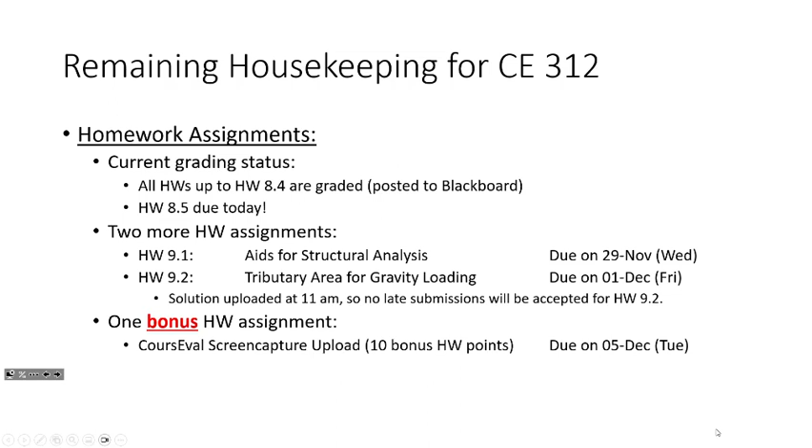Okay, let's talk about some other remaining housekeeping. Let's talk about lectures. So we're going to be doing structural analysis aids today. We're going to be doing tributary area on Wednesday.

These two lectures, if I wanted to give an overall theme, it's about bringing the class back to the real world. That's what we're focused on this week. And then we have our exam review on Friday.

The exam is on Tuesday, December 5th. The time slot we've been assigned is 10:15 to 12:15, but don't think that means I'm giving you a two-hour exam. I'm not. This exam will be formatted just like all the others. I'm designing it to be 50 minutes long, but you still get the full two hours. Just about every time I offer this exam, an hour and a half in, most of you are already gone. This is not intended to be a time crunch, and it's also not comprehensive.

What I'm covering on the exam is everything we're covering this week and influence lines. I'll also probably ask some conceptual questions about mastan, but you won't be running mastan on the exam, just conceptual questions on it. But influence lines, mastan, and what we covered this week—that's the final.

I'm also going to do a course learning outcome survey during the exam, just rating the course outcomes on a 1 to 5 scale, but that's pretty straightforward. That's this class in a nutshell. Done. Anybody have any questions?

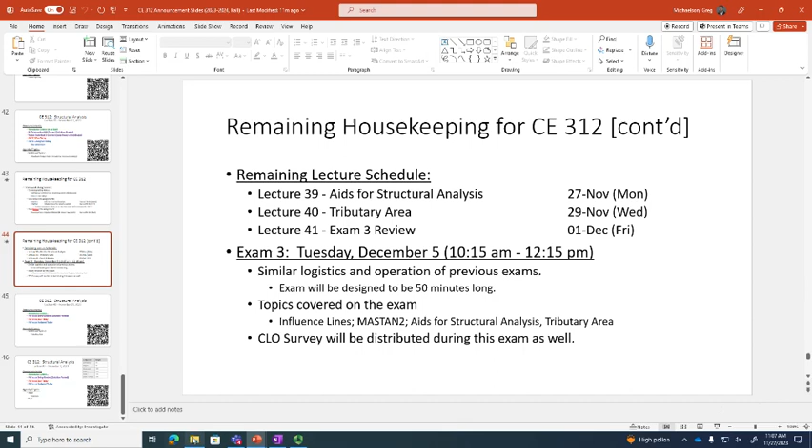All right, so that's the logistics for the class in a nutshell. Let's get into some topics. I have two additional topics for discussion today, and like I said, they're focused around the real world.

The first topic I want to discuss is what I call aids for structural analysis, or maybe a more specific way of phrasing it would be a formula set for common loading situations. So what do I mean by aids for structural analysis?

I want to refresh everybody's memories for a second and look at these two problems. Now, it's been a while since you've done some structural analysis, unless you did the homework assignment about 20 minutes ago. But if you did your structural analysis assignment before break, it's probably been a while since you've done this. I want to look at these two problems and make the point that we've analyzed these problems this semester in class.

Whether we were focused on determining reactions or shear and moment diagrams or what have you, we've done these problems. Now, I want to be clear, I don't think that was a bad idea. These problems are kind of tough, but they've served a purpose from an educational perspective. My philosophy is that if you can analyze this, you can certainly analyze what you're going to do in the real world.

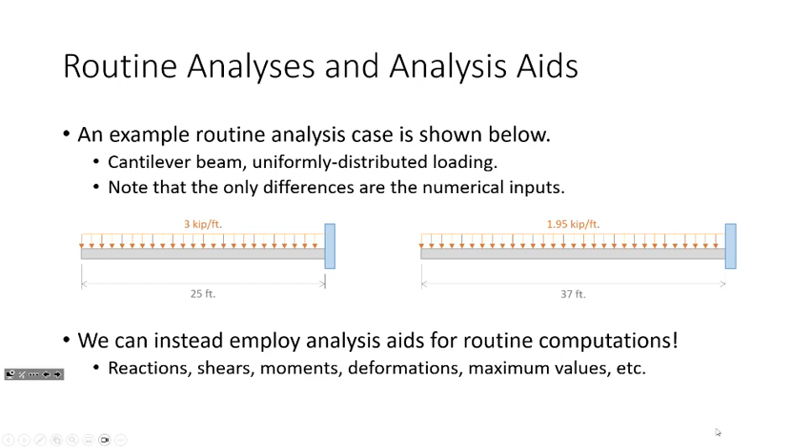This is very useful when dealing with routine cases. I can't tell you how many beams in this building are treated as simply supported beams with uniformly distributed loads. If you can do that one problem, you can do it over and over again. In fact, when we do beam design in steel, that's a lot of what we'll focus on - pretty routine analyses. Now, these analysis aids are neutral in regards to units, so there's no unit conversion factor built in. So whenever you're looking at deflections, you either need to use a unit conversion factor, like WL to the 4th over 8EI times 1728, or plug everything into a consistent unit system.

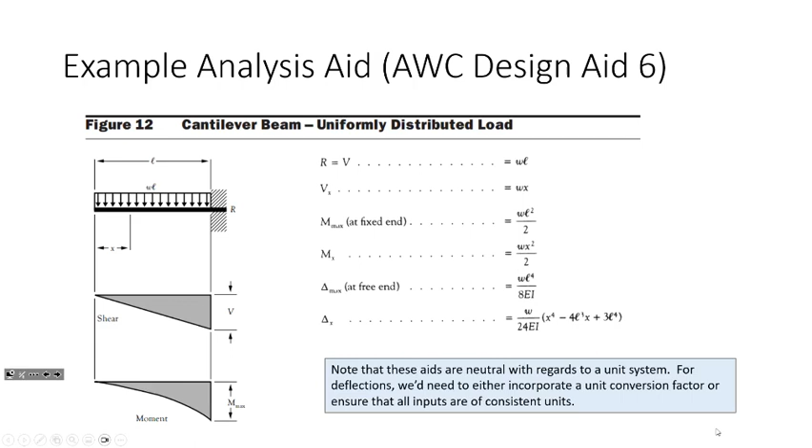I just mentioned that so you're aware. So this one is from the wood specification, this one is from the steel specification, this is from the steel manual. For those of you taking steel, you'll end up buying one of these steel manuals, and we'll actually use aids like this in the class. There are a couple things you need to be careful of when using the analysis aids.

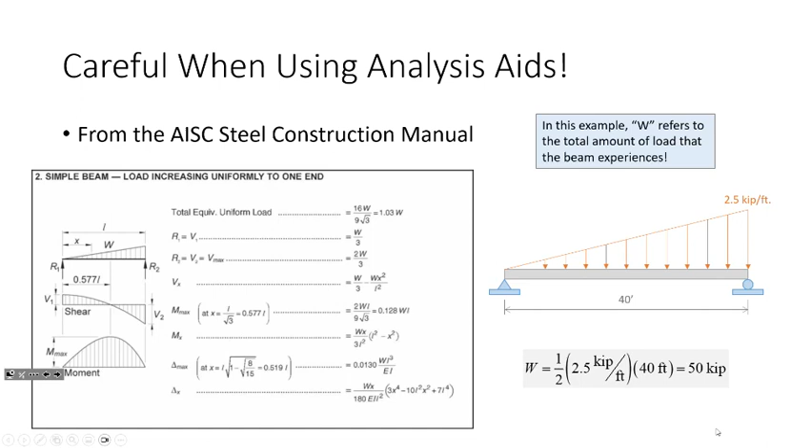Now I propose what I can do is say that equals this beam plus this beam. You see what I did? I'm just treating each load separately. But here's the problem.

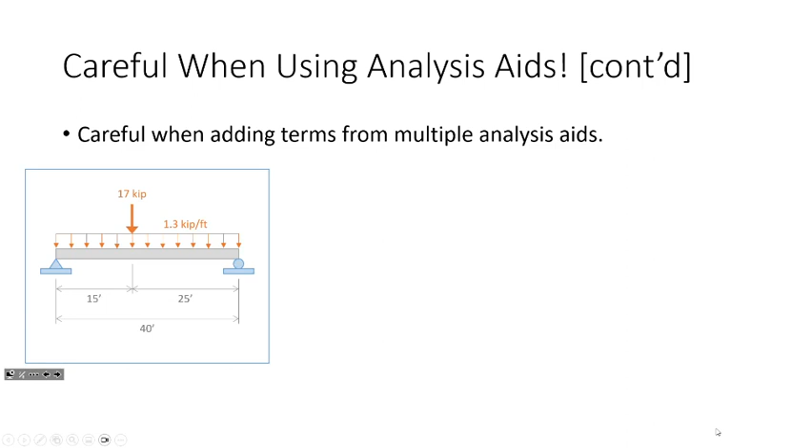So let's take the first beam. Here's the first beam, a simply supported beam with a uniformly distributed load, and I can calculate the maximum moment. Now the maximum moment is the biggest value on the moment diagram. For this beam, that's going to be right smack dab in the middle, right? But on this beam, it's not in the middle.

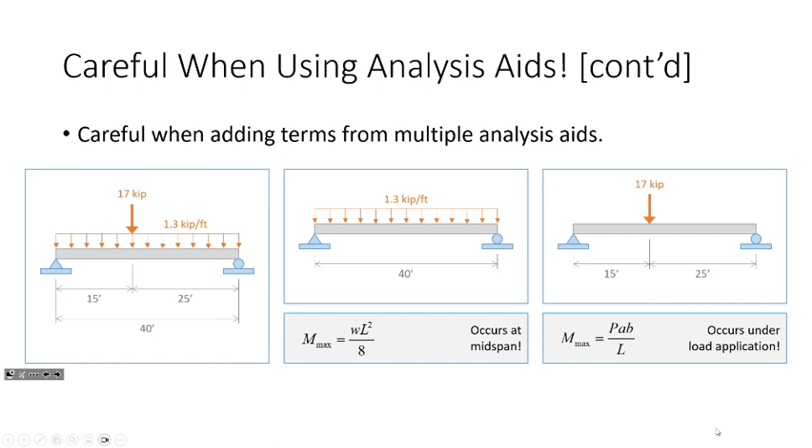For this beam, the maximum moment is where the load is. So sometimes when you're using these aids, you're tempted to say, oh, the maximum moment is that plus that. That's wrong, because those two values don't occur at the same location. So you can't add those Mmax terms together because they don't align with a similar location on this beam.

But what you could do, instead of adding the Mmaxes, is add the moment functions together. Probably what I would do, if I was doing this problem, is handle it one of two ways: add up the functions in Excel and plot it, or honestly, I might just analyze the structure myself without these aids.

These aids are intended to be shortcuts for simple situations. But if the problem gets too involved, the question is, do I really want to break out all these odd formulas, or do I want to just do the problem?

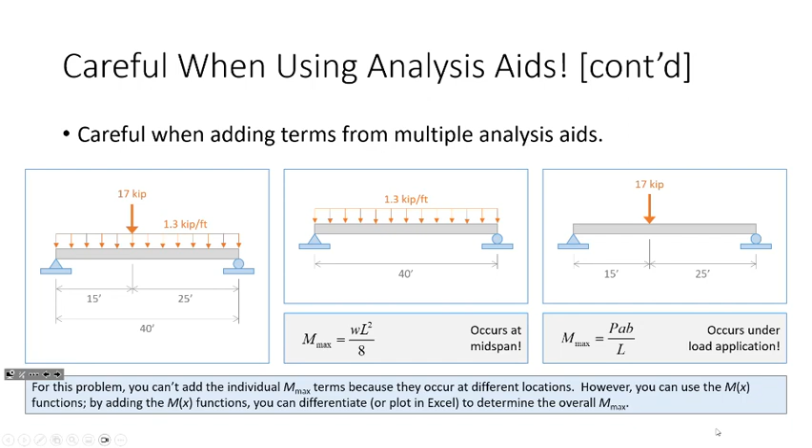One of the things about all the methods we've been discussing this semester is that they work great for problems like this. This would be a really bad problem to use analysis aids on, because for one, I don't think you'd find any analysis aids for a problem like this. But even if you did, the math would get so cumbersome that you might as well just analyze the problem directly anyway. Does that make sense?

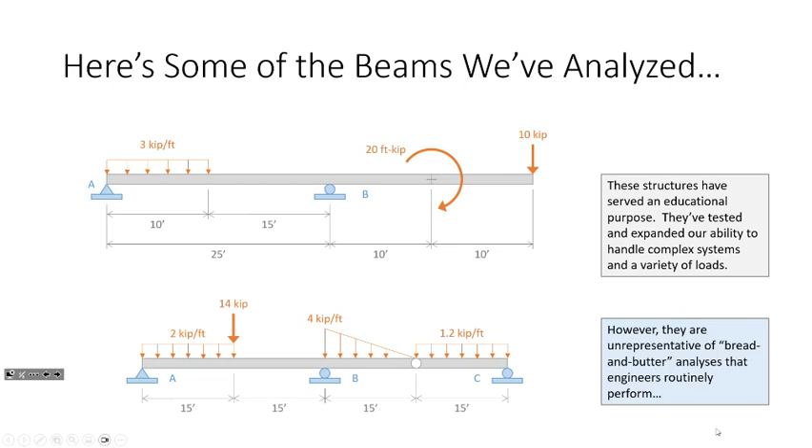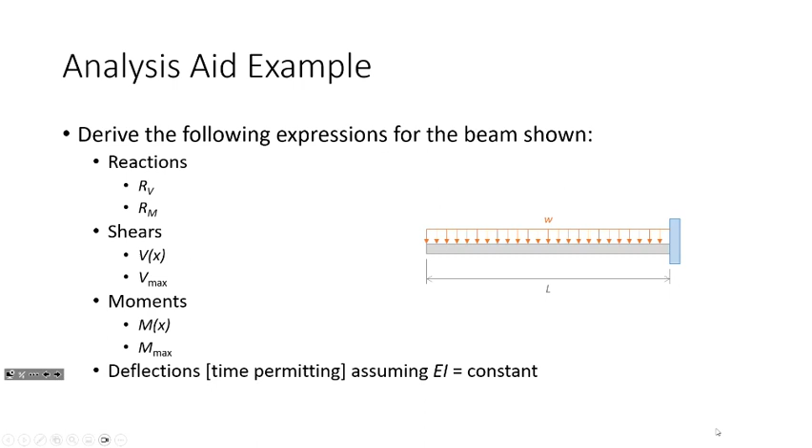So in order to understand them, I want to derive them. I'm going to go through the process of deriving the analysis aids for this problem. Let's see where we get with this. So we're going to derive the analysis aids for this beam.

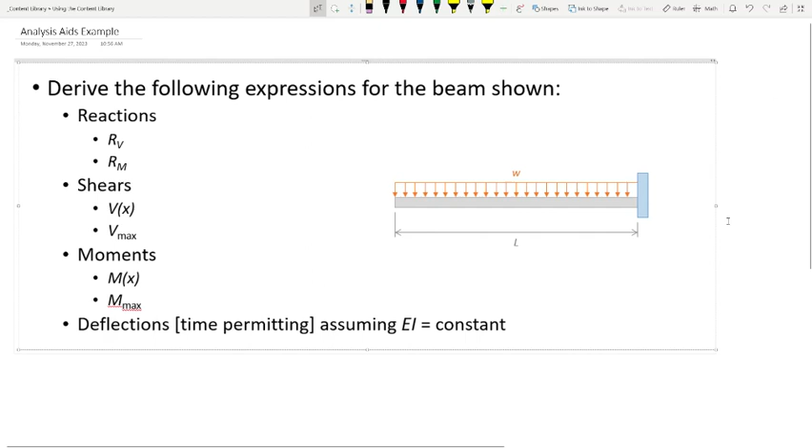Now let's take stock of what we would want. If I'm an engineer, what do I want to know about this beam from an analysis and design standpoint? Well, let's start off with the reactions. So, reactions. Now, I'm asking for RV and RM. What that means is I have a beam like this,

and I've got this distributed load on it. I'm going to have a vertical reaction RV and a moment reaction RM. I'm going to see if I can derive formulas for that. What else do I want? Well, what do I got here? I've got shears.

Okay, so what do I mean by shears? I've got here Vx and I've got Vmax. What do I mean by that?

Let's see. If I were to draw the shear and moment diagram, let's just draw the shear diagram. What would the shear diagram look like for this beam? I have a constant load over a beam of length L. So what would the shear diagram look like? Just conceptually, constant load means the shear diagram takes what shape?

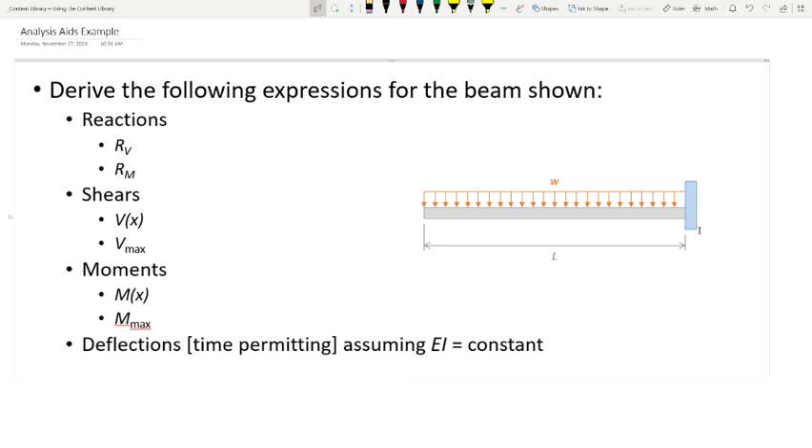Now we're missing one thing here, and I'll move it over here because I don't want to squanch: deflections. So what we're going to see is if we can figure out delta max, we're going to see if we can figure out delta of x. And that depends on whether or not we have time. So let's see what we can see.

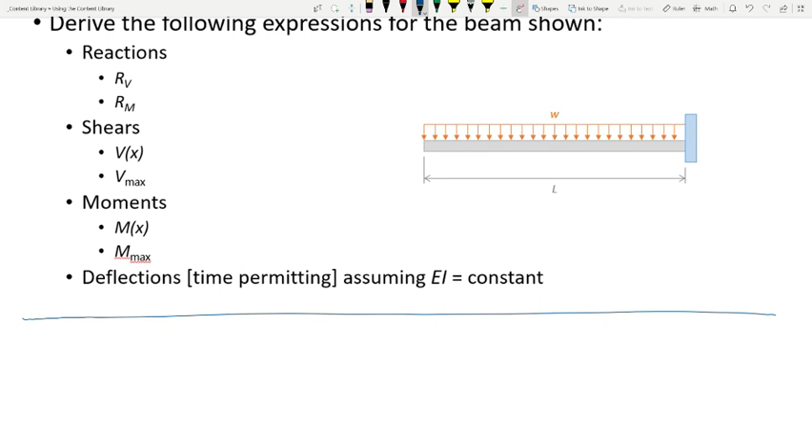Now what we're going to do is we're going to handle this problem the way that we've handled every problem this semester. We're just going to do it symbolically. That's the only thing that's going to be different. Okay, so let's start off with our reactions.

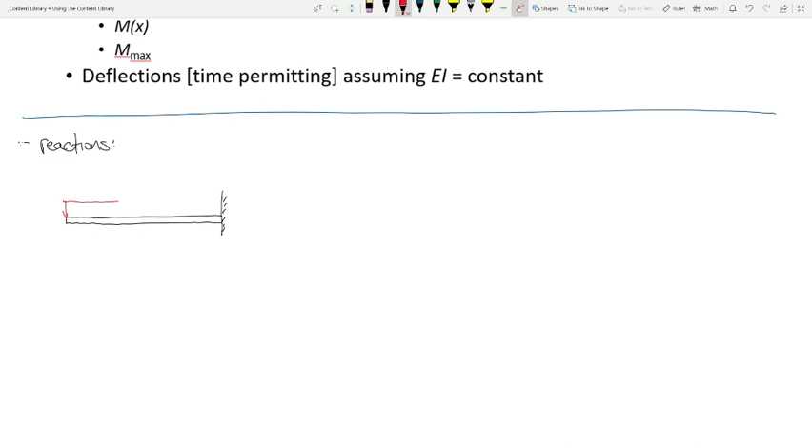So I've got W, and then this is L. Just redrawing what I put up here on the board. Okay, so remember, I don't like dealing with distributed loads. I will collapse that into a single point load. What is the magnitude of that point load?

Exactly right, it's WL, right? Because if this was 2 kips per foot over a beam of 30 feet, you'd say the load was 60 kips because you did the load times the length. So this is WL. And what is this distance? There you go. So what do we got?

Let's sum forces. So we've got, what do we have? We have RV going up, and we have WL going down. So we have that. So maybe I'll put that right here. So RV is WL going up.

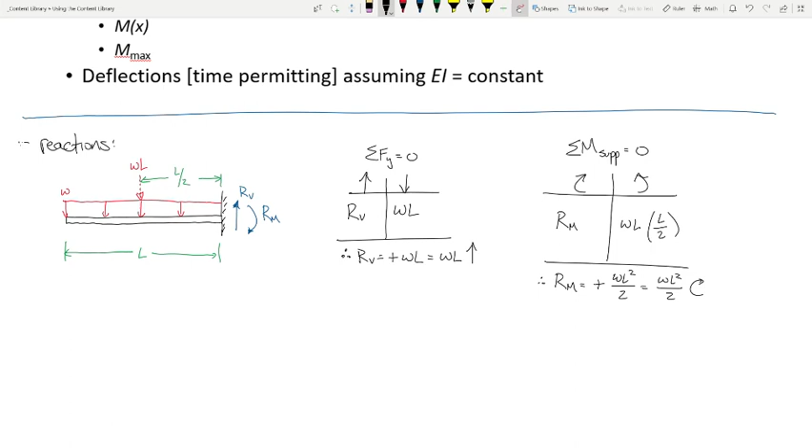Now let's see what we can figure out. Now I'm going to recopy these shear and moment diagrams right here. I'm just going to recopy this from the board. But you know what, let's take a look at this shear diagram just a little bit.

Okay, so we start at 0. We go down to negative WL and then back up to 0. What is the slope of that line?

What's the slope of this? Negative W. Exactly right, negative W. The slope of the shear diagram is equal to the magnitude of the load.

How about this? What is the area under the shear diagram? What's the area of that shear diagram? WL squared over 2. Exactly. 1/2 base times height, or I guess I should say negative.

Is that right? So here's our moment diagram. Start at 0, go down to a negative WL squared over 2, and then back up to 0, because that's what our moment reaction does.

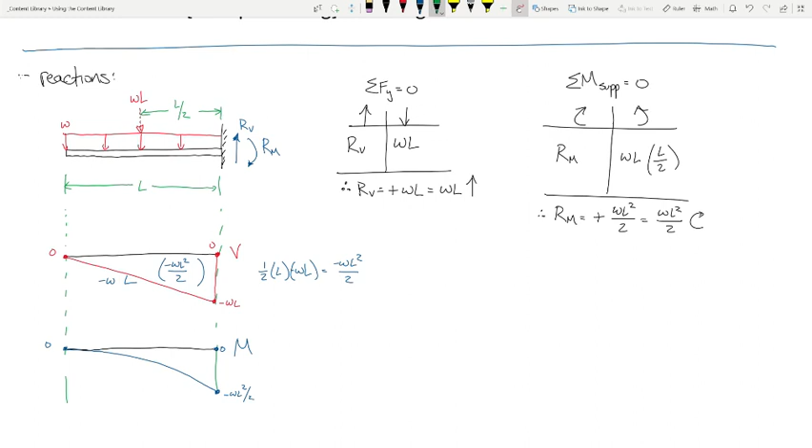Whenever you want to define functions, we need to cut a section through an arbitrary point in the structure, and we're going to look left. Does it make sense to look left? Which would be easier, looking left or looking right? Looking left, all we've got is the load. Looking right, we've got the load and all these reactions. Do it the easiest way, okay?

So let's do this over here. Let me lower that down a little bit. So this is W. What we're going to do is we're going to put a shear here.

Now, positive shear, should I draw it down or up? Down. And moment, should it be clockwise or counterclockwise? What's positive? Counterclockwise. Okay, good. Let's make sure everybody's awake.

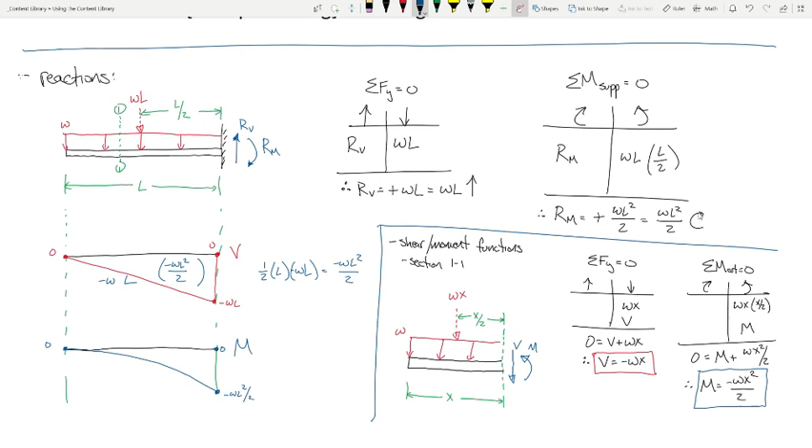Let's do it like this. So maximum deflection, okay? So what we're going to have is a real structure, which is going to look like this.

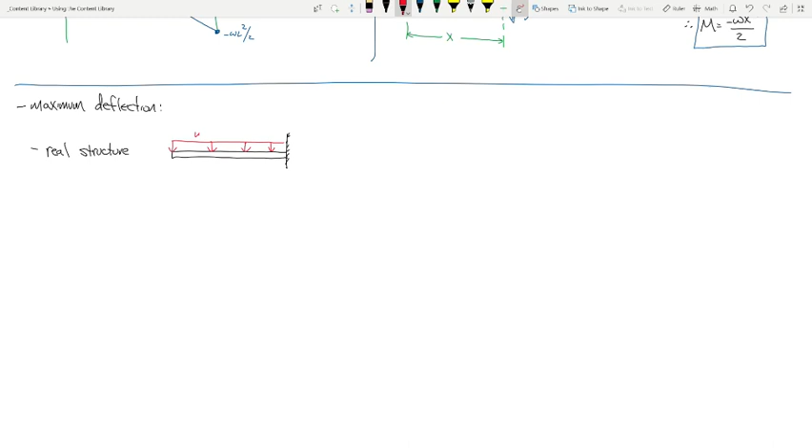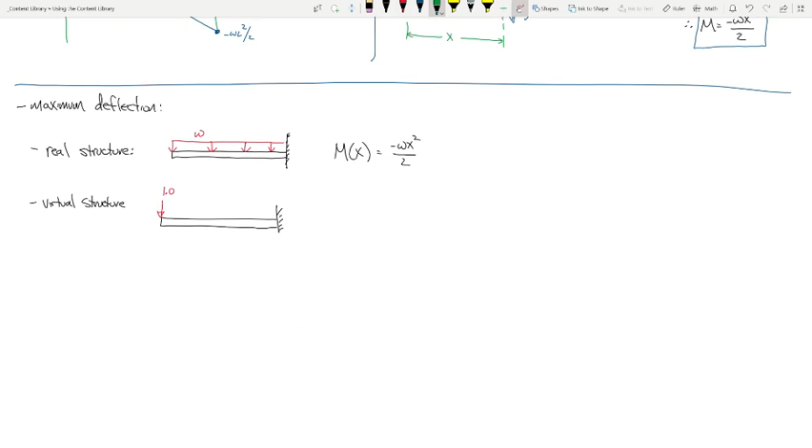And we found that m of x is that. But then for our virtual structure, it's that. Okay? Now maybe I should put my dimensions on here.

So how am I going to find the virtual moment function? Tell me what to do. How do we find the real moment function? We cut a section. So how do I find my virtual moment function? Cut another section, right? So I'm going to cut a section right here.

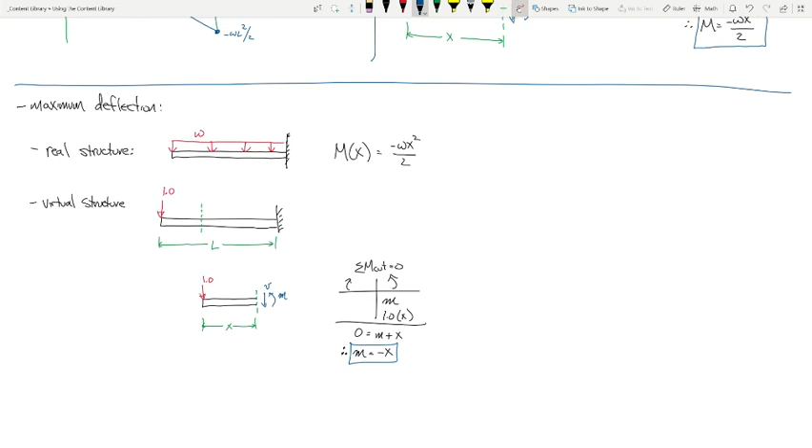So now we have our real function and our virtual function. Okay? I'm going to rearrange this screen a little bit because I don't want to scroll too much on this. So bear with me. We'll move this over here. And we'll move this over here. This you cannot do on a whiteboard, I must say. Kind of nice.

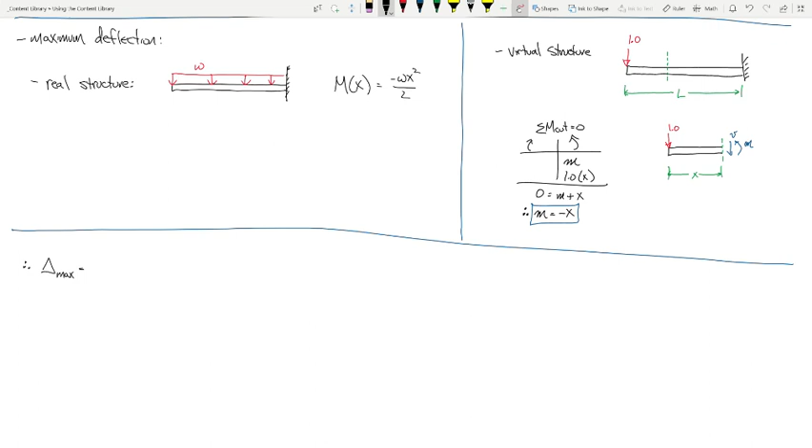Okay. So we have our real structure and we have our virtual structure. So therefore, delta max is the following.

Now, unfortunately, we've got to deal with a little bit of Calc 1. I'm sorry. We've got to deal with some Calc 1. But it's not bad, it's not that bad. So here's what I'm going to do. I'm going to say, let's pull out that fraction.

There's little m. There's big M, okay? See what I did? Just substituted. All right, now let's see what else we can do.

I'm a big fan of whenever we're doing integrals, I like to pull all the constants out. I don't like constants inside the integral because I think that messes things up. So see how I've got a 2 on the bottom? Got a 2 on the bottom, and we'll put that right here.

Is W a constant? Yeah, anything that's not X is a constant. So I'm going to pull out the W and the 2, and then I'm left with just that. That's pretty easy, isn't it?

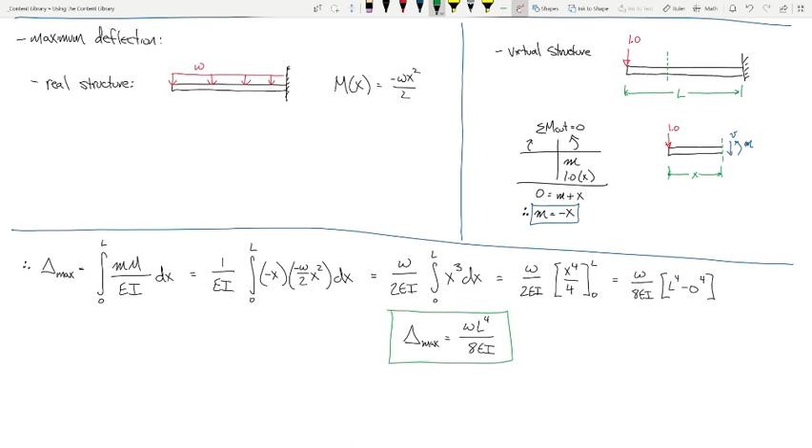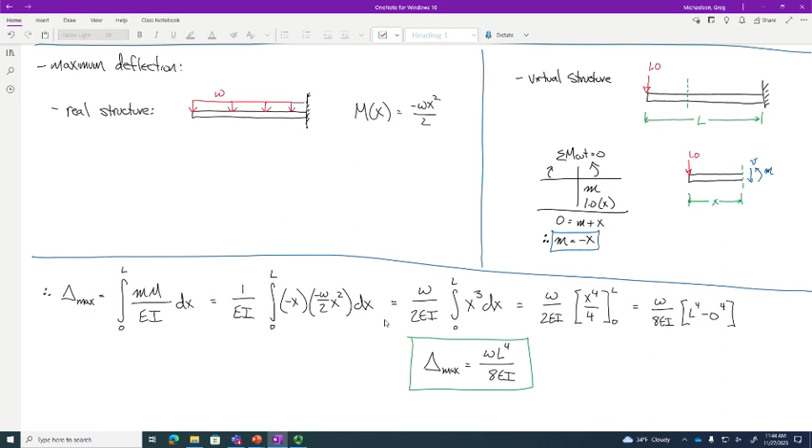Now, I'm going to leave this one for you if you would like to do it on your own, but I'm going to give you a little bit of guidance on how you would do it. Because there does become a point when it just becomes like alphabet soup. So I'm going to do a little bit of it, not going to do all of it, but I'm happy to do some. I find that whenever you're trying to teach this stuff, once you get to the point when it becomes alphabet soup, I think you all kind of follow along with what's going on. So let me show you how this works.

Okay, so this is the maximum deflection. This is the deflection at any point. So how do you do that? Okay, so let me show you how I do it.

This is how I do it. Okay, so first off, we know for the real structure.

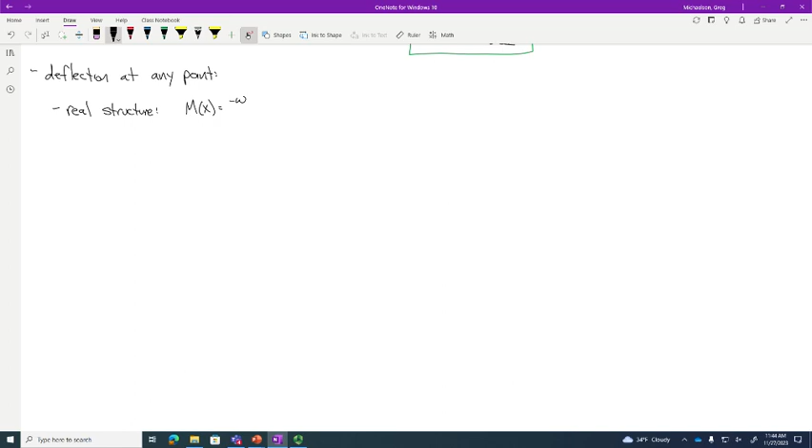Now, what about for the virtual structure? The way that I like to do this, and the way I think it's easier to track everything, is I like to introduce a new letter. So what I'm going to do is place a unit load at A.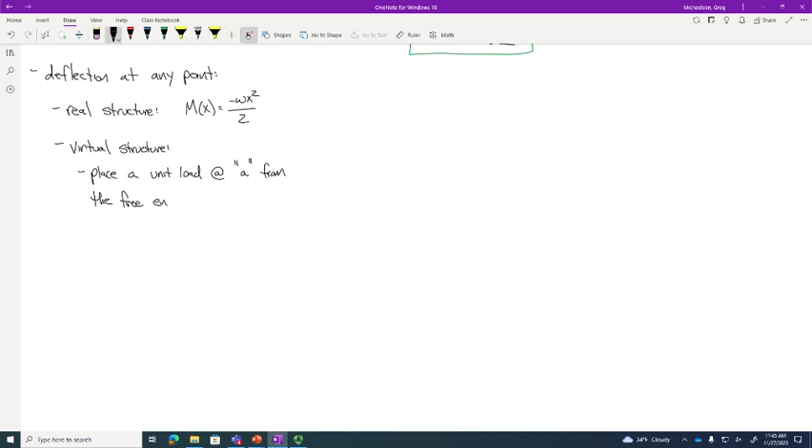I'll say it's A from the free end. So what that looks like is I have a beam that looks like this, and instead of placing the load at the free end, I'm placing it somewhere right here. We'll call this 1.0.

You heard that too, right? Mm-hmm. Okay, what is that? I don't know, okay, I just... I'm just going to keep going. All right, I got sidetracked there.

So this dimension here I'm going to call A, and this dimension here I'm going to call L minus A. All right, so now let's analyze the structure and let's see what we get.

So if I have 1 down, then my reaction here is 1 up vertical. And my moment reaction is going to be like this, and the magnitude is going to be L minus A.

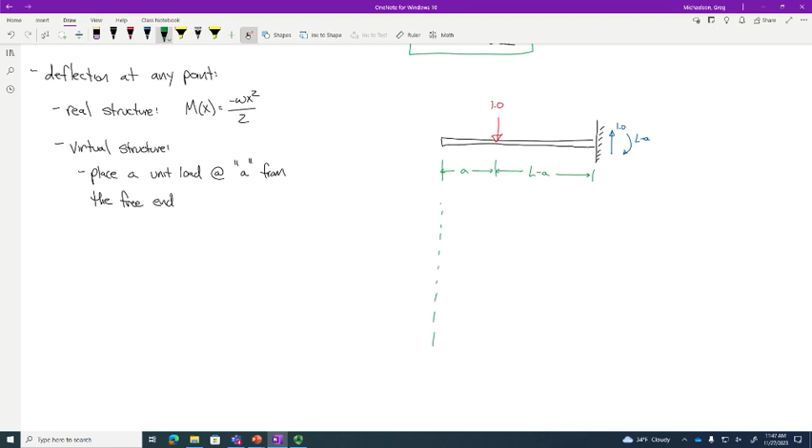So if I were to plot the shear diagram and the moment diagram, here's what they look like. The shear diagram looks like this: we start at 0, go to 0, drop down to -1, go over at -1, jump up to 0. Is everybody okay with that?

So the area under the shear diagram is going to be negative L minus A. And then the moment diagram is going to be 0, 0, and then it's going to drop like that, jump back up to 0. This magnitude right here is going to be negative L minus A, and remember, the slope of this is -1.

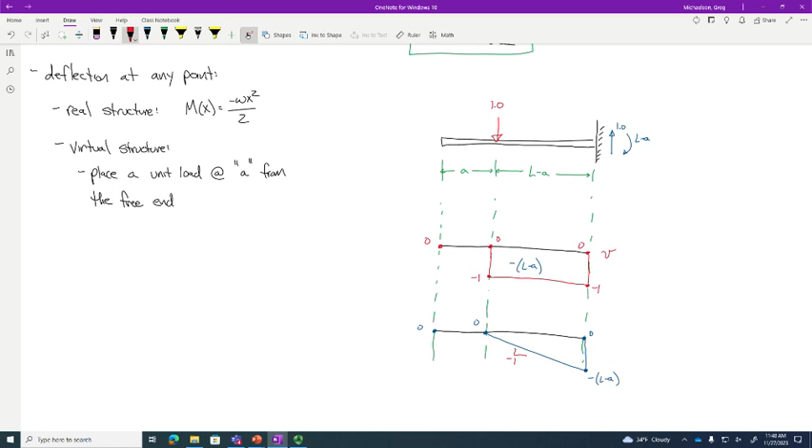So this means I'm going to have two virtual functions: M1, which is 0, valid from 0 to A, and M2, which is valid from A to L. The equation of this line is actually really easy—it ends up just being A minus X.

If you're wondering how I got that, I'm just using the point-slope formula, and I'm saying that the coordinates of this point are A comma 0. So that's how I got that—it's not really all that concerning.

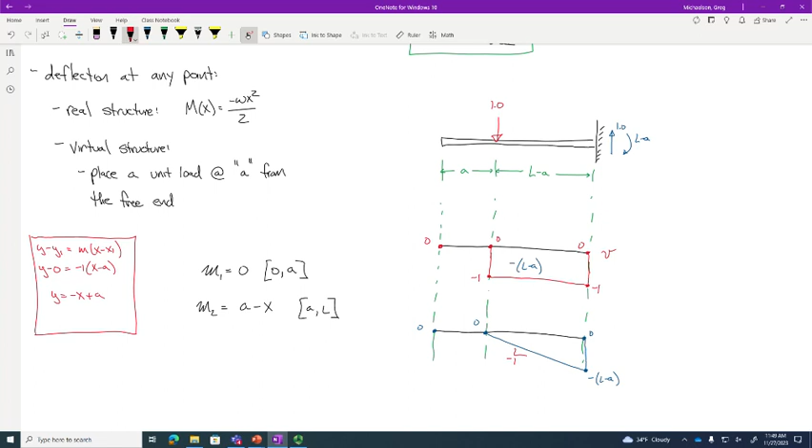We're getting close on time, so I'll rush this last part along. In order to find the deflection at A, we say the integral from 0 to A plus the integral from A to L of this. The first one goes to 0 because that first function is 0.

When you chug this out, this is where it just becomes alphabet soup, because we have the integral from A to L of this. Once you chug it out, you get negative W over 2EI times 1/3 AL cubed minus 1/4 L to the 4th minus 1/12 A to the 4th.